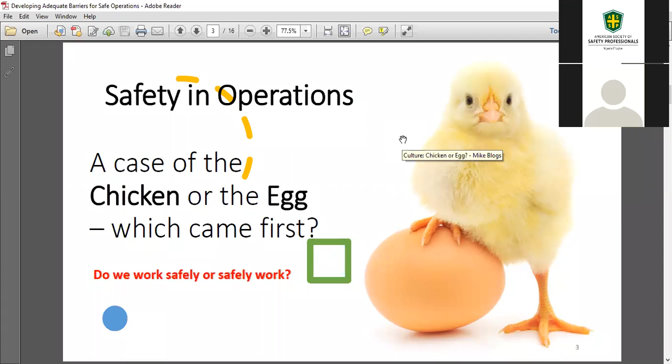In the real sense, safety and operations should actually work in a symbiotic manner. They should complement one another. A safe operation should actually be a more efficient operation. And when we understand how barriers play their roles in our operations, we may be best put in a professional stand to make our safety more relevant in the operations.

Now, what do we do as HSE people? What we do basically is to understand what hazards and risks are and prevent their occurrences. In summary of all we do as HSE practitioners, this is just it. And this slide is just to review the definitions.

As we all know, hazards happen to be anything, including processes, that have the potential to cause harm to any person, equipment, or environment. Now this definition shows that almost anything can constitute a hazard.

Risk, on the other hand, is the possibility or the probability of releasing that hazard in a particular situation, and the consequence of such a release.

To make it a bit clearer, water on the ground can cause slips and falls, so it's a hazard. However, if that water is at the corner of an office, the risk there is less than if that water on the ground is at the staircase. You will all agree with me. So hazards and risk are not the same.

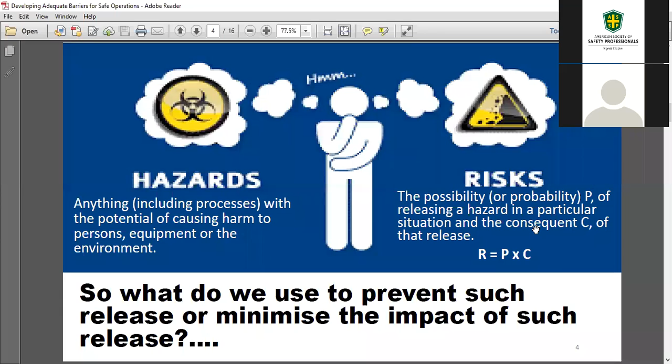Like I said, this is the sum total of what we do as HSE practitioners, whether you are a trainer in HSE, whether you are a safety officer, whether you are the one that is drafting policies, or you're the manager or the supervisor. The sum total of what you're trying to do is to prevent hazards from being released or minimize the impact of such release. We do this by creating barriers.

Practical example: we build fall protections for work at height to prevent falls from happening. But we also put fall arrestor gadgets in place in case somebody does fall, so they do not actually hit the ground.

So if your barriers for prevention are adequate, it's likely you do not have a major event. However, if you do have a major event, if your barrier for corrective action or mitigating the incident is adequate, the consequences will be minimal. So you need barriers in these two areas: preventive and mitigating.

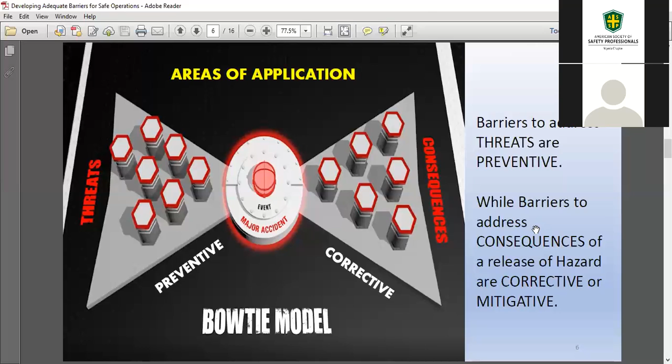I hope we understand. Now, barriers, as good as they sound, unfortunately are not perfect. There is no single barrier that is 100% proof for several reasons. So most times we do not rely on a single barrier to prevent an accident from happening. Many times we have to combine barriers to form layers of protection for a particular hazard or a particular operation.

Now, for each of these barriers that we are putting in place, they should be able to operate independently of one another. No barrier should be dependent on another barrier, because that means that if one barrier fails, the other barrier is no longer useful. They should be able to operate independently, and they should also be able to work together in harmony to create a layer of protection.

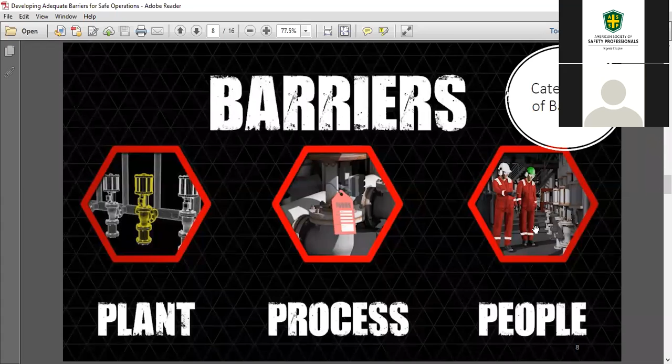Now, in operations, we can divide barriers into three categories: plant barriers, process barriers, and people barriers. The plant barriers are also called safety and environmental critical elements. These are the barriers that we engineer into our plants, created along with the design of the plant to protect against incidents happening. Examples of such barriers are fire and gas systems, emergency shutdown valves, temporary refuge, etc.

Keep in mind, like I said earlier, you need to be thinking in terms of preventive and mitigating. So barriers should be available for you to prevent top events from occurring or to minimize the impact of such top events, depending on your risk assessment.

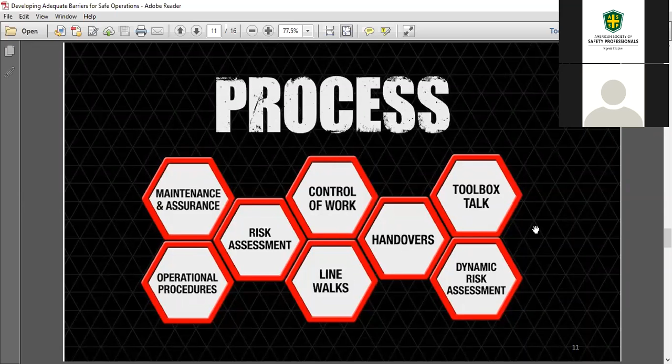Then lastly, we have the category of people. This invariably means competent people. Having competent people in our process is a major barrier. One of the things that weakens the effectiveness of barriers is actually people, human error, human interface, human involvement in operation. So we need competent people. When we talk of competence, we mean people who are knowledgeable, educated, trained for the job they're doing, skilled, experienced, and with the right behavior.

That's where safety culture comes in. If we recall the last knowledge sharing that we had, we discussed safety culture and developing safety cultures in our organizations. So this makes up competence in people.

And if we have competent people, it forms a major barrier to prevent the release of top events or minimize them. Most of the time, we have emergency shutdown systems. If people are not knowledgeable or trained to activate those ESDs, it may more or less be useless. So competence matters. So why do barriers fail?

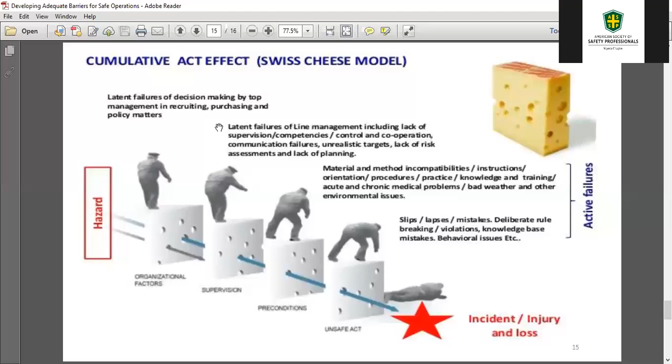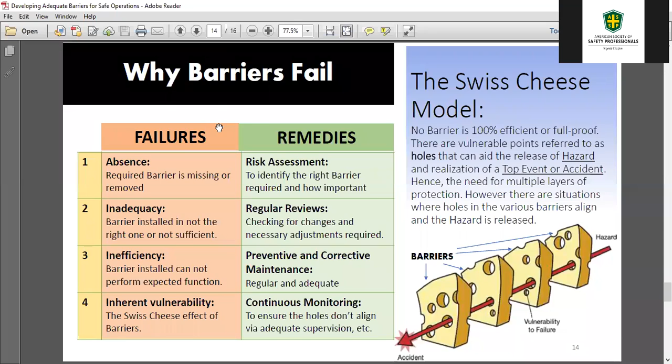But I can promise you that if you practice these four processes: adequate risk assessment, regular reviews of your barriers or processes, preventive and corrective maintenance on your barriers, and continuous monitoring on your processes, you are most likely not going to have any top event or any major accident on your location. I don't know if we have any questions.

Like I said, I tried to make it as brief as possible because we have another training and time is fast spent, so that we can have time to discuss. Do we have any question?

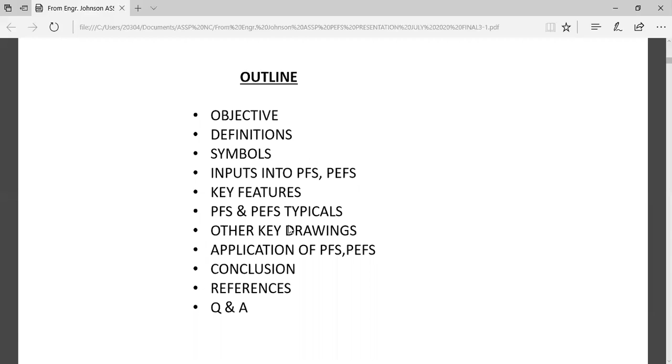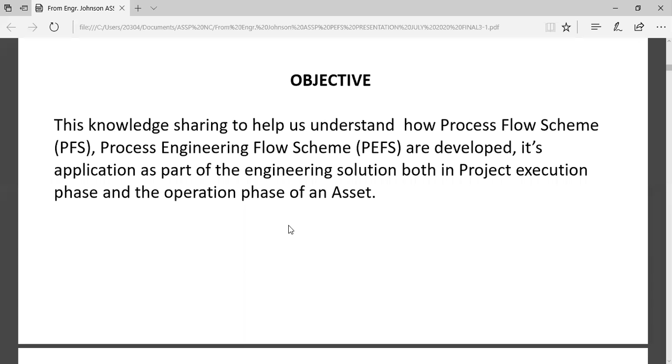Okay, I think I can see the slides now. So that's the outline we'll run through. We can go to the next slide. Okay, so the objective, as I said, is to really familiarize us. Some of us probably are already familiar with this, but also a few things around process engineering flow scheme and the application for projects and for assets, and generally, practically it's used for everything. And we're going to see that when we run through the presentation. Go to the next slide.

So process engineering, process flow scheme. Now, this is basically a high level drawing that is first produced by the process engineer, the key discipline here. You want to develop a facility, let's take an oil and gas facility or a factory, want to produce biscuit or whatever. Process engineer sits down and there's an agreement. We want to produce so much volume and so much rate, and block diagrams are developed.

When these block diagrams are developed, they are put into a scheme, and that scheme would have major equipment, and there's what you call the material balance sheet. This is essentially a sheet that contains the processes, the flow rates, for instance, temperatures at different points in the facility. But the process flow scheme is high level, so it doesn't contain so much detail. You see major equipment there.

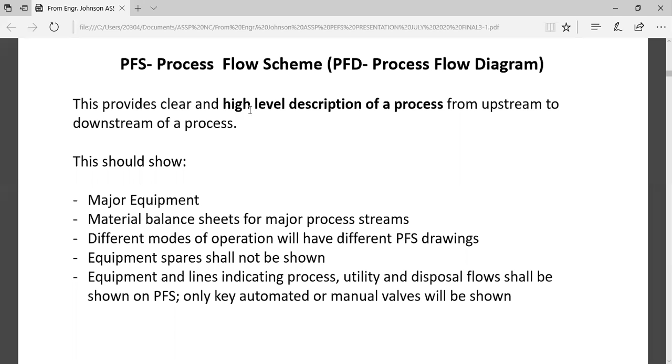If you have different modes of operation, maybe you have single train running, double train running, steady state mode, dynamic mode, all kinds of modes, you present it in different PFSs. Otherwise, you just have a simple PFS. If you have multiple equipment, you don't show it all in the PFS, you just show one, but then you indicate that it's more than one. So if it's a pump, you show just one pump times maybe 5, just to make it simple. Let's go to the next slide so I can have the graphical display.

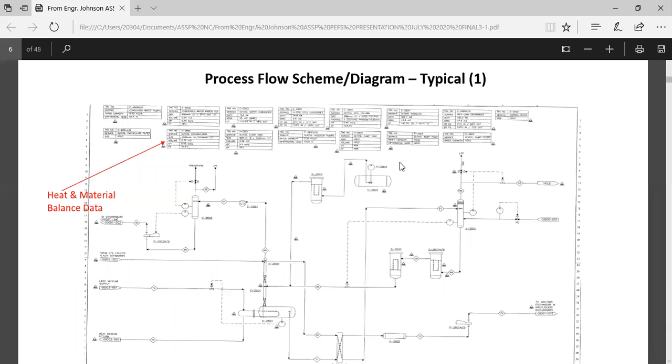Now, this is an example of a PFS. It's simple. What you have on top there is talking about the different kinds of processes and their dimensions. For instance, where the red arrow is, that actually is not the material balance sheet, but it's the data from it. But if you come down and look at each of the lines, you see different diamonds. Those diamonds are actually called streams.

And those streams indicate what process data you have there. So for instance, you can have a particular point in the facility where the temperature is high. Maybe it could be 100 degrees. And then by the time you flow through a cooler, heat and material balance indicates all of that.

So the process engineer should have sat down with other disciplines, control, mechanical, electrical, maybe you have heaters there, turbines. You will look at all of that and say for each part of this facility, this is the status of the process parameters. This is the pressure at this point. This is the flow at this point. This is the temperature at this point.

By the time it transits through a vessel, for instance, or through a compressor or through a pump, of course, that changes. So at some other point, again, you see another diamond that tells you at this point, this is the material status. It also includes the pipings. Maybe the rating of that piping has changed from maybe 3 bar to 10 bar. So across the flow scheme, you have that material and heat balancing. You want to show that across the board. So what you are seeing in front of you is a typical PFS.

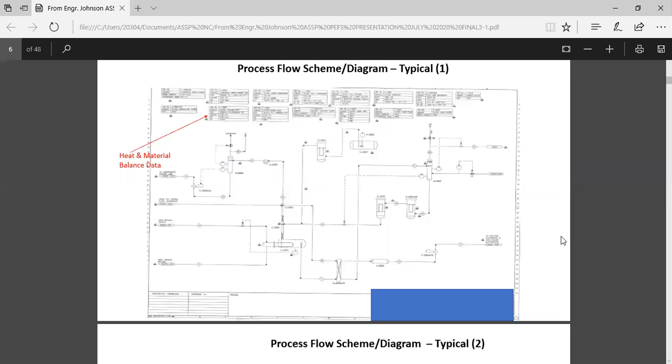Let's go to another one. Similar as well. But there again, you see that the details are not too many, by the time you go to the PEFS. Meanwhile, this is also called the process flow diagram. Call it PFS or process flow diagram. Again, the same thing. Now, typically, this will have a grid. So you see the numbering. That numbering helps you to locate where particular items are in terms of description. Let's go to the next.

So after you have the process flow scheme. Now, process engineering flow scheme is also called the piping and instrument diagram, the P&ID. This represents the process in a more detailed, schematic, pictorial, graphical way and gives you the details. So in this case now, as different from the PFS, you start seeing dimensions. Now, they're not to scale, but you start seeing things like, for instance, if you have a vessel there, we tell you what the material of that vessel is.

Is it stainless steel? Is it carbon steel? We tell you the temperature, the maximum operating pressure of that vessel, the working pressure. So you have those extra details. Then it tells you a lot about instrumentation. What kind of instrument do you have on that vessel or on that piping? Do you have a relief valve on that vessel? Do you have a pressure control valve? Do you have a pressure shutdown transmitter? How is it installed? It will tell you all those details.

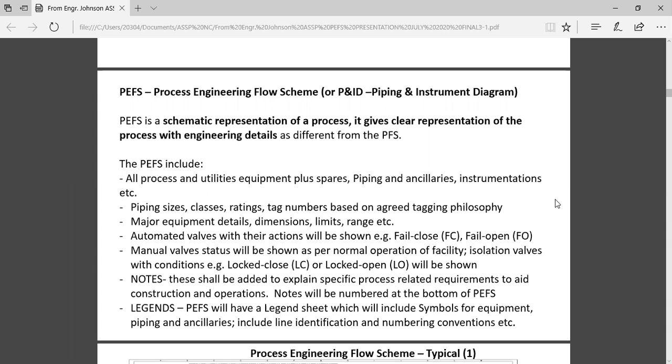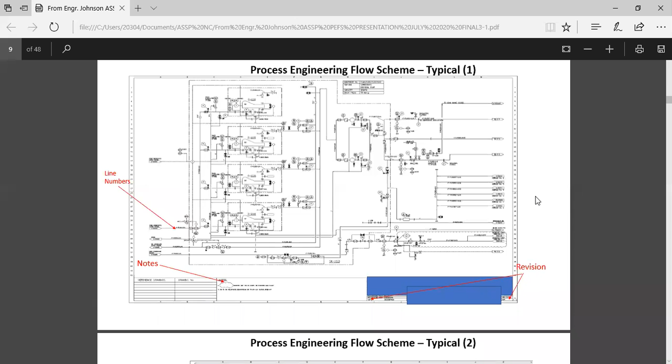Let's go down a bit. I think again, yeah, similar again, detailed description. Now you see a vessel there. So that cylindrical horizontal vessel is a vessel. It could be vertical, it could be horizontal, and then what you see on top there is a legend describing that vessel, as I explained before.

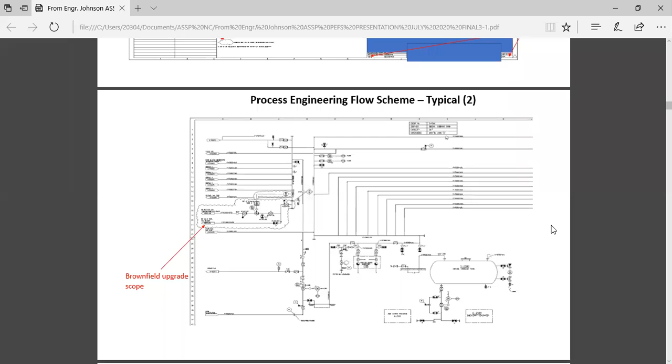So you see this. So on top of the vessel, you see the detailed description of that vessel. What is it? What is the size of that vessel? What's the service? What's the pressure rating and all that? If you go to the next slide, let's skip to the next. Let's leave the third one. Let's go to the next one.

Okay, now, so what goes into developing a PEFS or PFS? I mentioned earlier the heat and material balance. So the process engineers essentially do that. It tells you the process streams across the facility, from the inlet, because if I take the oil and gas, for instance, from the well, you have very high pressures coming from the well. And then by the time you get through the manifold into the facility, the pressure starts dropping.

You could have control valves that step down the pressure, and then it goes into a high pressure vessel that can absorb that high pressure from the well, steps it down, drops the liquid, and then goes to the next stage. So at these different stages, there's a change in the process parameters. There's a change in pressure. There could be change in temperature. It could remain the same. Flow rate could change as well. So all of these are indicated across the facility.

Then you have the process control scheme. So these are the kind of scheme you want to use to control your process. For those of us who are familiar with automation, you could have split range, override control, simple control, multiple control, cascade control. So these schemes are agreed between the process engineering and the instrumentation automation field. They agree what kind of scheme you want to use to control your process.

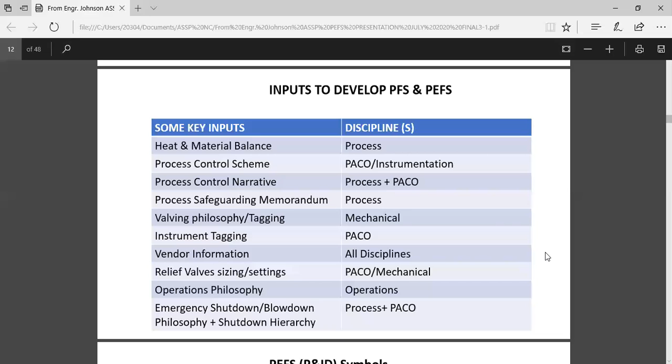Do you want to have ESD 1, ESD 2, ESD 3, and all of that kind of hierarchy of shutdown? So these are, amongst many, some of the key inputs that go into developing a PFS or PEFS. Now, talking about symbols, these symbols are essentially based on ANSI and ISA standards, and they are not to scale, as I said before. So your PEFS and P&ID drawings are not to scale.

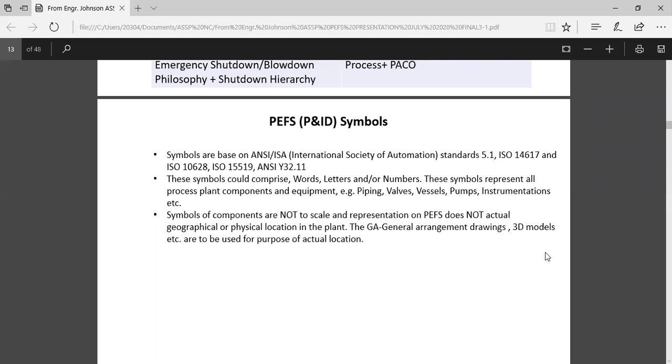So I'm going to talk about complementary drawings that help you to put everything together. It's a drawing that can be used for many things, but when you start going to construction, you need to have other complementary drawings, which I'm going to show. Okay, let's go to symbols now. Of course, I won't be able to exhaust all the symbols, but as I said, when you go to a P&ID or a PEFS, the cover page will have a legend, because they are bespoke per PEFS. You have those symbols that will help you to understand that PEFS.

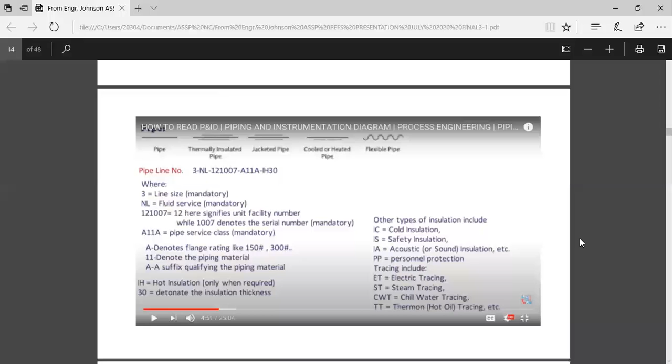So as I said before, you have the line number. Every piping you see within the PEFS will be labeled. And if you look at that label, typically, like in this case, you have 3NL 12. The first thing you see there, which is very important, is the size: 3 inch, imperial 3 inch. Then the next thing you see after the dash is the service. Is it liquid, is it gas? You see that labeled there as well.

Then you see the other parts that follow. The first is for the facility. Facilities can be numbered uniquely, so if it's a unit, for instance unit 21 or unit 31. Then you have the rating. That rating is very important. When you go after the A11A, the A there is talking about the ANSI rating.

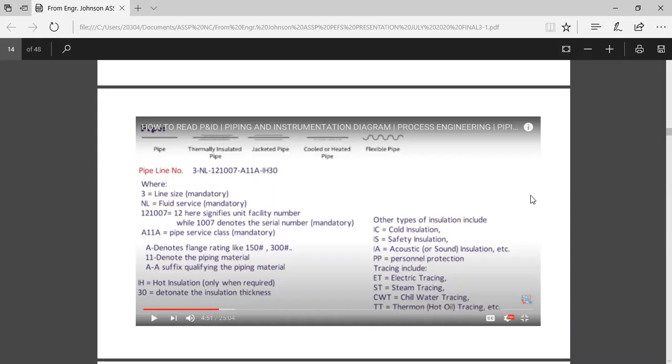Now, naturally, as an automation person, I'll be a bit biased, so I'll try to run through most of the instrument symbols. Mechanical symbols I consider to be straightforward: you see the pump, the exchanger, the condenser, the vessels. But the valves and controllers matter, because if you look at a typical PEFS, 60% of what you see is instrumentation, the valves, the control scheme. So this is a typical symbols of the valves. You see the different kinds of valves, the gate valve, ball valves, screw valves, and all of that.

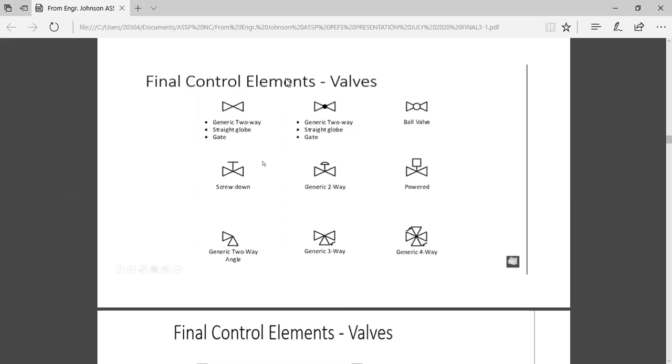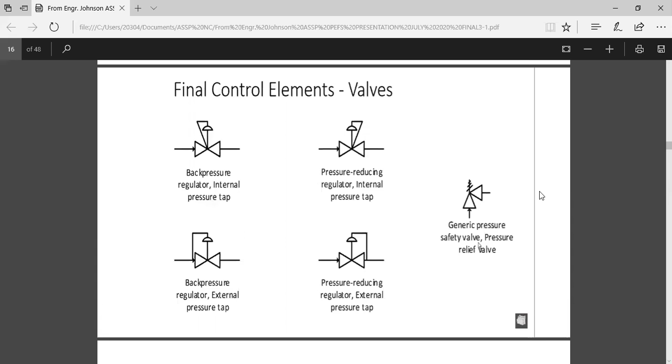So go to the next slide as well. You see automated valves. Next slide, you can roll up a bit. Thank you. So you have the self-actuating valves, then you have the valves with labels, FO. FO means fail open, FC fail close. You either see the FO there, or it's indicated with an arrow, meaning that when the valve fails, it fails to those positions. You also have fail to last position, and then fail to last drift open or drift close.

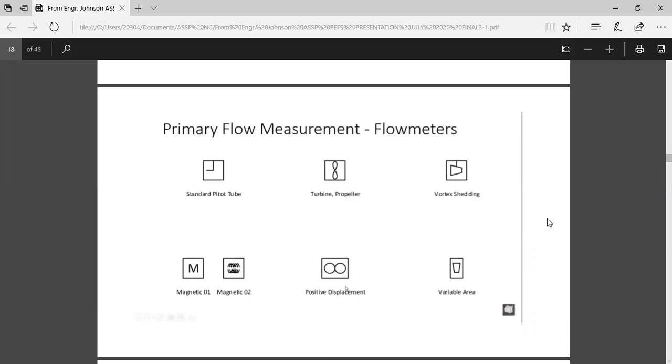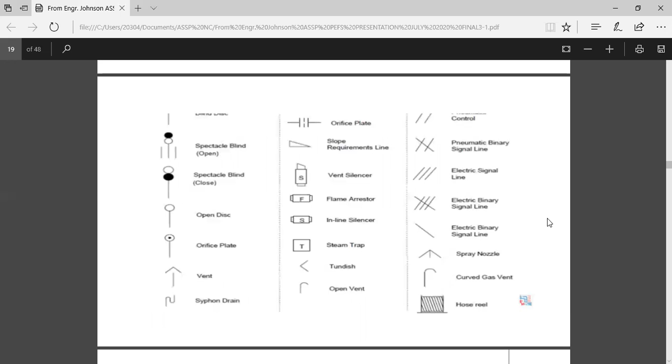Actually, this has to do with the flow regime. You could have flow with certain characteristics and pressure that may cause the valve to fail towards opening, so you need to indicate that. Let's go. You have the metering, the flow meter types, whether they are turbine type or magnetic type. Let's go down. You have the spectacle blinds, you have the spades, and all these are symbols the legend will describe to you, but these are just typical. I'm trying to just run through this.

And then you also see instrumentation with these indications, whether they are localized. Usually when you see it like this without any line across it, it means it's localized. You can read it locally.

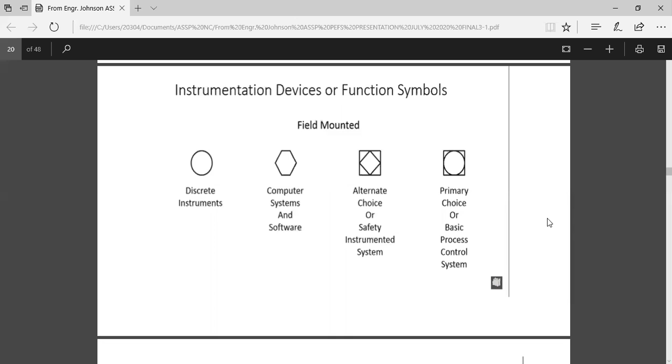So like a gauge, for instance, will be indicated like this because you see the gauge in the field. If you go to other ones that have the line across, it means they are also instruments, but they are not accessible to the operator. The diamond shape is usually for shutdown.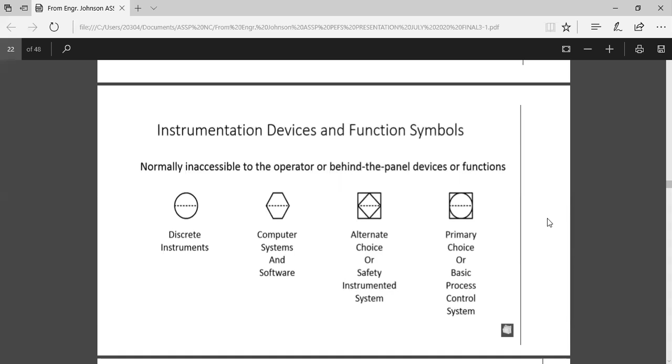So when you say diamond shape, that's for shutdown. When I go there, I'll explain the symbols for shutdown, like a Z and all of that. Let's go down. I think the material will be shared, so that we can have time, it can be a reference for us.

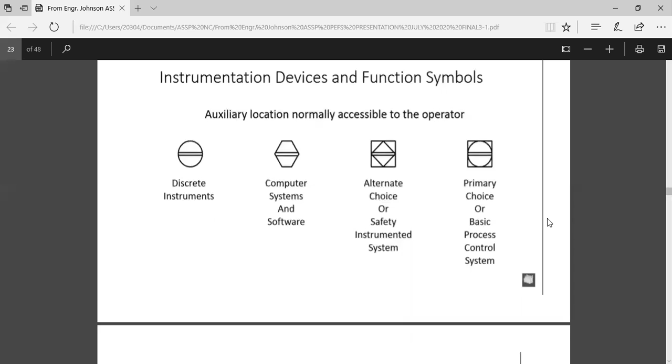So let's go to other symbols. Okay, let's go down. So now, when you see a typical PEF, you see the way the instruments are explained. For instance, let me take my industry, oil and gas. Key parameters we run with are pressure, flow, level, temperature, and a few other ones, like density and co.

Now, when you see LCA or LICA, the first letter describes the core parameter. So if you see P, it's talking about pressure. If you see L, it's talking about level. And then the next one is a condition. So if you see LI, it tells you level indicator, or LC, it tells you level control. And then you see alarm. This is just trying to explain the different configurations you could see lined up in your PEFs.

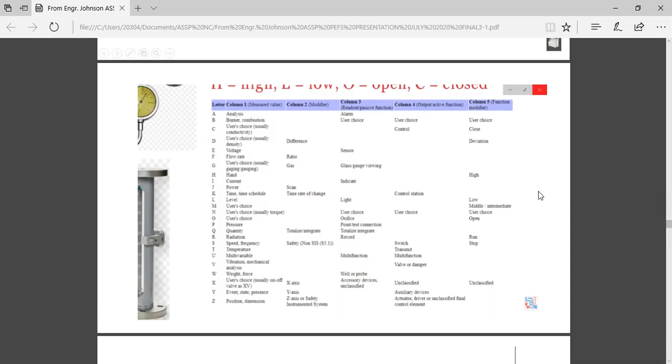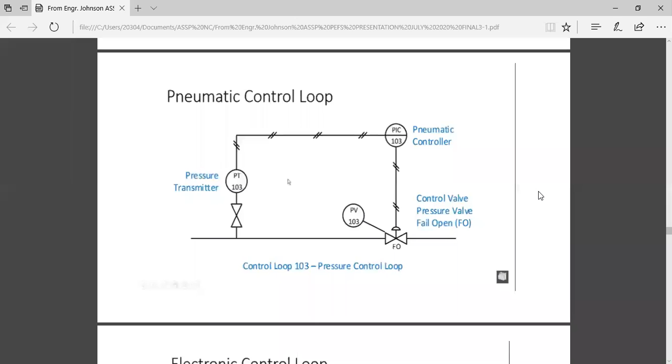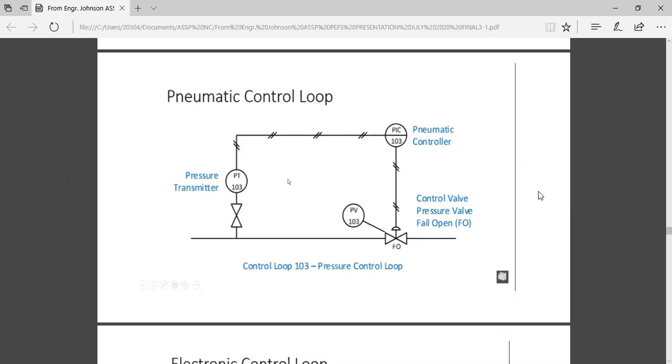So these are typical, and the loop number - when you see PT 103, PV 103, PIC 103, it means that control loop is control loop 103. So you're going to see 103 in a PEF, you're going to see 104, 105. That tells you, in case you are troubleshooting, you know where the issue is. It gives you a unique description of that loop, so each loop has a unique loop number. That's typically what you can see in a PEF.

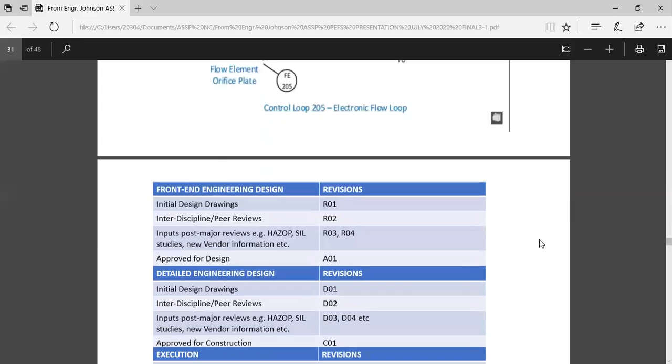Let's go to the next one. Okay, thanks. So this is similar to what I've explained. Now, let's try to talk about revision. So when you go to your PEFs, you have different revisions.

This generally tells you when you initiate your first drawing, typically the revision number is revision 01, R01. Then you could have a peer review - maybe process engineers initiate it with the automation engineers, and then you want every discipline to look at it. You have peer review, maybe with colleagues from other departments. You could revise it after review, and you have additional things to include in that drawing, so you rev it up to the next revision level.

Then you could issue that for a SIL assessment, for HAZOP, for other reviews. If those reviews come back with inputs, and you have to revise and include those inputs, you rev it up to R03, until you are done and say, okay, this is now ready for detailed design. You want to move it up, you can then issue it as approved for design. So it's no longer a feed, you're done with the feed, you want to move it on to detailed design. Then in detailed design, you do D01, D02, and if you agree that's okay for construction, you rev it up to C01.

So that now means it's approved for construction, or AFC, but typically what you see in the drawing is C01. Then when it goes to execution, you rev it up as you do your construction, and during construction you could have field changes, approved field changes where changes are approved within the project through the management of change process. When you are done with construction, you stamp it as built, and that's what you hand over for operation.

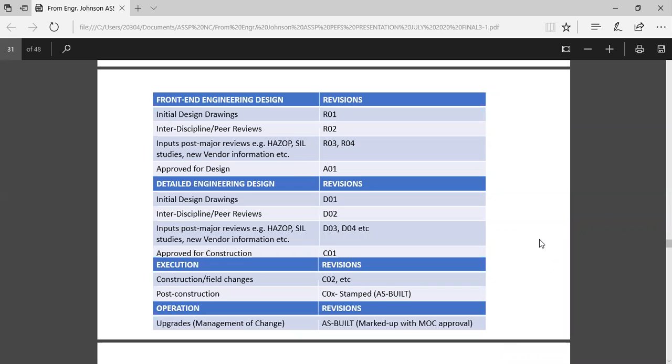During operation, as you work with the drawing, you mark them up, and periodically the marked up drawings are supposed to be signed off, and then they are usable with management of change. Where I work, every other period, 6 monthly or 1 yearly, we redraft that drawing with all the markups, and then we reissue it to operations.

So PEFs have a lot of application. I cannot be exhaustive in what I will say, but PEFs have a lot of application. Your PEF, once you do your feed, can help you for pre-contract - you can use it as a pre-contract document, and to do initial cost estimates.

Because it shows you all your major equipment, you can use it to develop specification for pre-contract, for tendering, the initial tendering ITT. You could do your HAC - area classification - where the electrical guys look at different zones of a facility, and it also helps you agree what kind of equipment you want to put there.

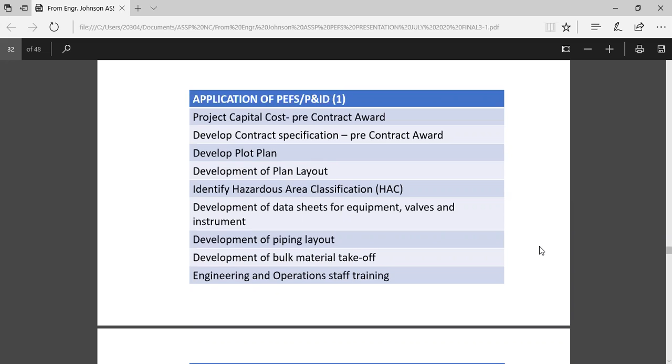It's like explosion proof equipment - how do you agree with them - zone 0, zone 1, zone 2. And piping layouts, material takeoff, the MTO - all of this, the PEFs can help you to do. And of course, for training the staff, both engineering and operational staff, you can use this.

Let's go to the next one. Other applications - for process safety review, for HAZOP, as mentioned before, you need the PEFs. In fact it's a key document for HAZOP, with all the methodologies you want to use, for safety instrumented function assessment, the SIL assessment, or process hazard assessment, for layer of protection analysis, and for risk assessments, as we've been told before.

For incidence investigation, to develop your HMI graphics - when you want to develop graphics for your control room, operator stations, you need the complete PEFS. For commissioning and startup, when you want to systemize your facility for startup and commissioning reasons, you use the PEFS to segregate your facility.

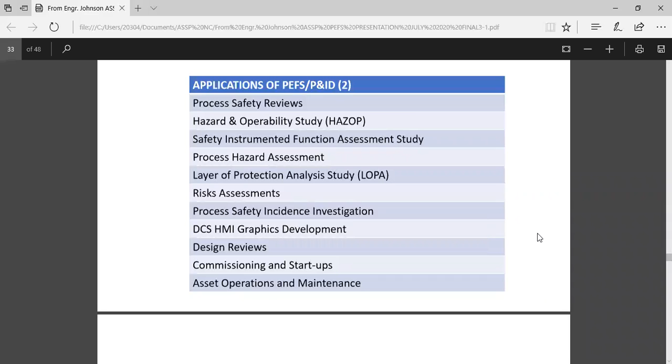So, okay, I want to start this section first, and then move to that section - you need the PEF, you need to mark up the PEF. And then for operation, life cycle operation of the asset. Let's run, I think we are getting towards it, as I mentioned before.

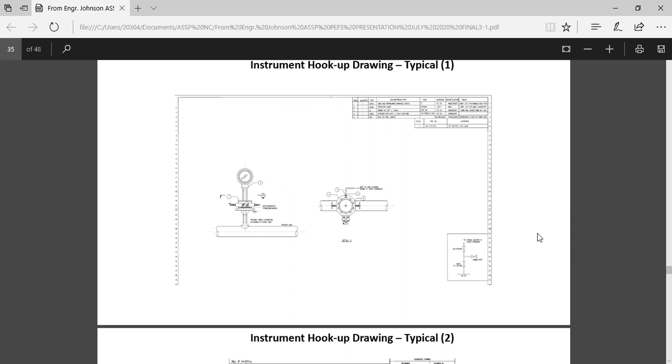You have complementary drawings that are needed for you to work with your PEF for construction. So you have what we call the hookup drawings - this essentially tells you how to install your instruments, your gauges, your control valve.

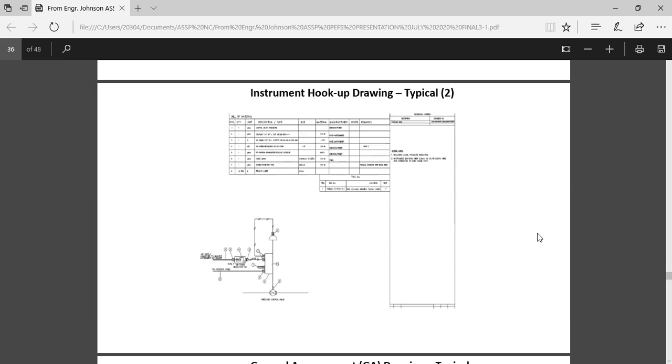You have the general arrangement drawings. General arrangement drawings actually tell you the plan view of your facility - how the facility is arranged. As I told you, the PEF is not to scale, so the GA will give you the placement, because the PEF will not tell you the placement of your equipment.

The GA will tell you this is where the heater is, this is where the generator is, this is where the vessel is. So that's a key drawing. You have the 3D model as well - this is reviewed during the project. The 3D model of your facility is something you need as well.

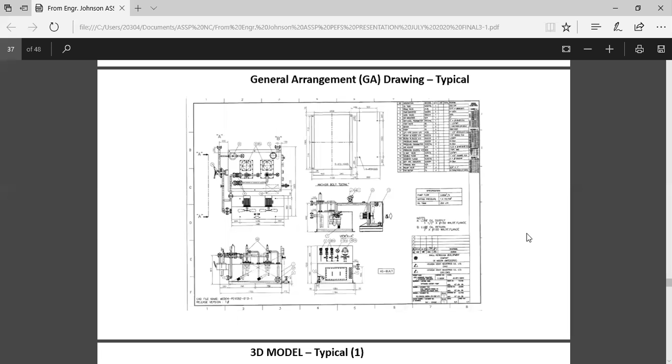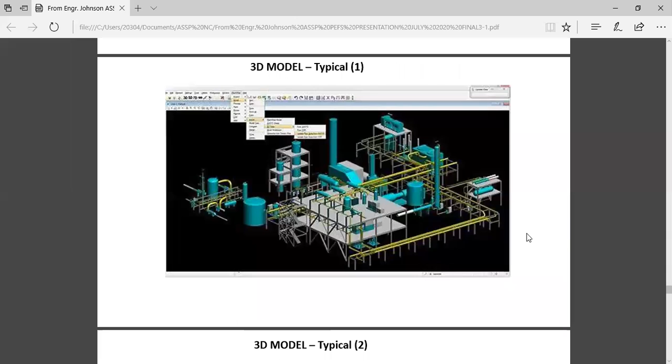Let's go down to the next slide - so you have a typical 3D model of your facility. As this is being constructed, your contractor, if it's an EPC for instance, you can do a 30% model review where you look at how they've done so far, and when you are towards the end, you get a 90% model review where you look at the final state.

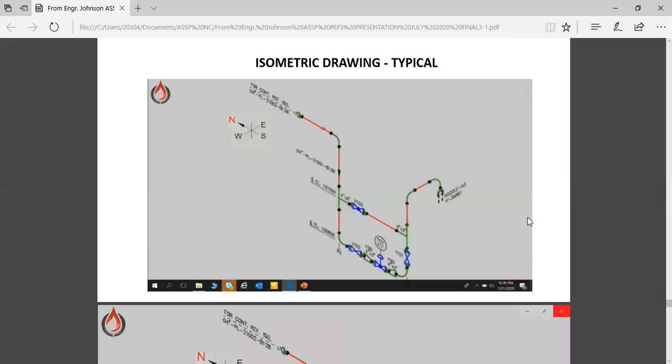Isometric drawings are very important, mechanical guys will tell us this. The isometric drawing also tells you the elevations of your drawing, all the slopings and how these are installed. So isometric drawings are very important for your construction.

So these are all drawings that complement the PEF. Whereas the PEF will be like the mother drawing, but for you to move into construction, you need all these other drawings.

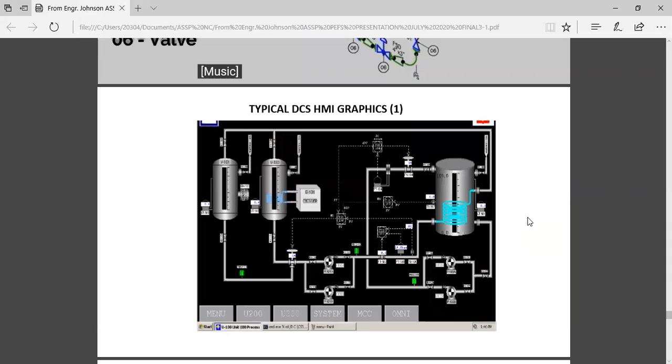I think we are almost wrapping up now. So typical, again, as I said, for graphics you need your PEF. This is typical graphics in a control system, and this is developed using the PEF. It will not be as detailed as a PEF, but you usually make this a bit simple so that the operator will not be confused. You use the PEF as a base drawing to develop your graphics.

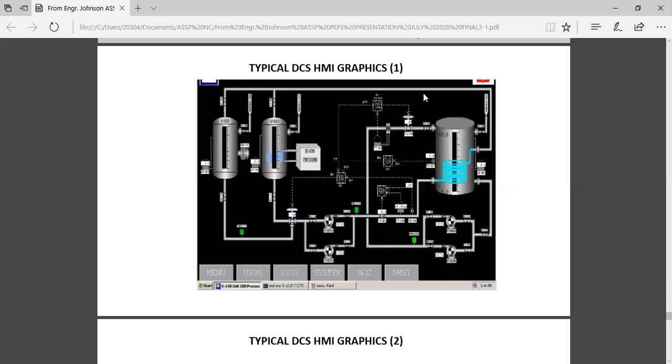So these are another typical graphics as well. This is what the control room operator will see, but these are all developed with the PEF. So if you make a mistake in the PEF, you also make a mistake in the graphics and all of that. That's why when you update your PEFs, you need to freeze it at a point so that when you are developing things like the graphics, you are not confusing the operator.

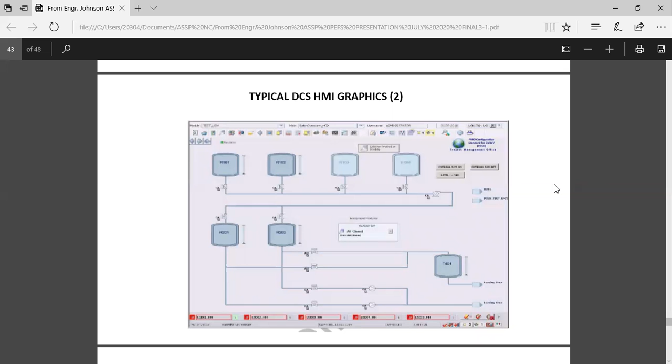In conclusion, I've had to rush a bit and maybe I couldn't drill down on them more than I could now because of our time. But essentially, the PFS and PEFS are foundational drawings in engineering, and they present the entire process graphically, and they feed into other drawings that can help us achieve many things.

In terms of reference, I would encourage us, there are a lot of resources online that can be quite handy for us to do. I'll also be available even after now. If you want to get my contact and reach me, I'll be disposed to do that for those in this association.

So there are references - piping mantra, ANSI standard, piping official. If you Google this, you get more detail on all of this. So I think this is where I'll conclude. Thank you for having me, and thank you for your time.